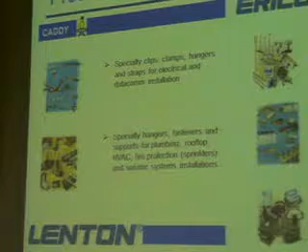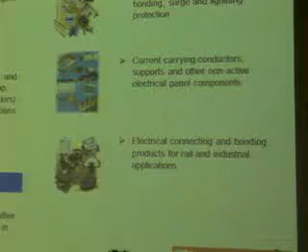The Caddy business is divided again into a very focused business. We have divided it into 4 or 5 groups of focused business, but generally if you break it up, it's split between electrical and mechanical. For the mechanical side, we have specialty hangers and fasteners to support plumbing, rooftop, HVAC, fire protection, and seismic. From the electrical side, we have products to supply anything from electrical installation right through to the data center, right through to the telecommunication tower. So it's a very focused business.

But today we're just going to cover the fire protection side, because that's what Saberindo's business is into - fire protection.

We have a global presence. We actually have an office in Jakarta, at the Sapona Tower. I used to go to that office a lot. For the lightning protection, the Erico side, we have one engineer based in Jakarta to support the distributor. So my goal for Caddy is to develop the business so that I can hire a local engineer to be supporting you all on a daily basis.

To work out, to help you all talk with consultants, support you technically. So my target really is that by 2017, I should have a sales engineer to be based in Jakarta, to support the distributor for just the Caddy.

This fire and seismic team is a global team that we formed in 2011. I am a bit unusual for the Caddy business, in that if a salesperson is doing fire and seismic, they only handle fire and seismic. But because of my experience, I handle the 4 product groups.

I oversee fire and seismic. I also help in the HVAC business. I also help in the electrical side. So it's a very focused team. We serve a very niche market. And one of our strategies is we come up with very innovative product development, which I'll talk about when we go into the product.

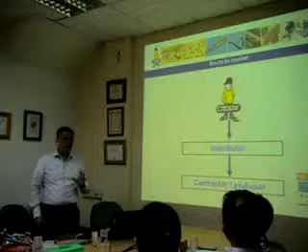So how do we enter the market? Our route to the market is very simple. This is me representing Caddy, and Saberindo will be the distributor. Saberindo will go talk to the contractors, end users, consultants, and all that. So we do not enter the market directly. In every country that we operate in, we do not enter the market directly.

Also, the other difference is we do not believe in having too many distributors. We're not like Tyco, we're not like Viking, where they have multiple distributors, and sometimes the distributors fight among themselves doing the project. So we tend to deal, for example, with this fire products, we only deal with Saberindo.

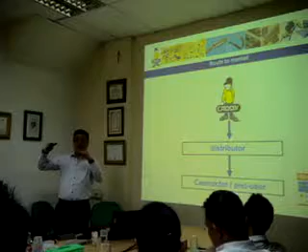Any inquiries that come, let's say a contractor, after you go and do your spec work, contractors always like to try to contact Caddy to see whether they'll go direct. Often, the way we see the risk, we say please contact PT Saberindo. And most of the time, as we move on in this relationship, I will get a project update from either boss himself or one of you saying, sir, these are the projects we're working on. So any time we receive an inquiry, we know what projects we're talking about, and we would not let the contractor or another so-called agent come and control the market.

It's important, I stress this a lot because I've seen some of the big brands, when they don't manage this well, they don't care whether, ultimately, they know the brand will be used, but whether they buy from distributor A or distributor B, they don't care. But in Erico, we don't want to operate like this, because it becomes very confusing in the market, and more often than not, the price will have a problem.

Because if Samuel is competing with you on the same product, you cannot offer any difference. The only difference you offer is either delivery or price. Because of that, she's also trying to compete with both of you, so it becomes 5% less, 5% less, then they come back to me, Spencer, this project, we need more discount. And then we give the discount. At the end of it, the price just keeps going down.

So for 112 years of Erico's operation, we do not believe in that route. Big brands like maybe these guys, they can, because they are big. We are not. Our turnover is 580 million, but we are a privately owned company, so we are not being pressured by shareholders or investors to change the model. So our model has been kept that way, and we will continue with this model as we move on.

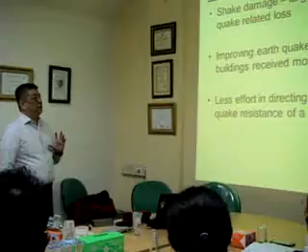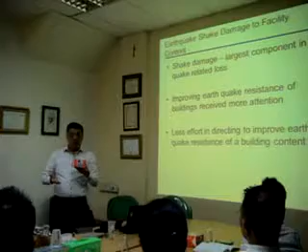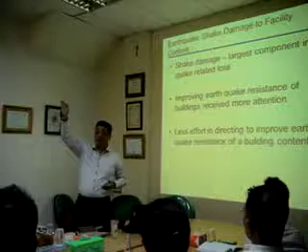I think some of you have heard this yesterday, right? Now, when an earthquake happens, the biggest damage that's caused is usually the shaking. If I use this box example, this is a building. When an earthquake comes, the shock wave comes and basically causes the building to move. And when the building shakes, you have electrical services on top, HVAC, plumbing, gas, every service. So the services are knocking each other, and because they knock each other, it creates damage.

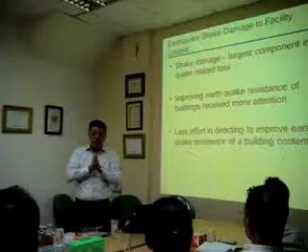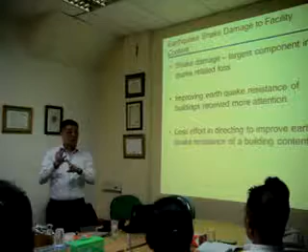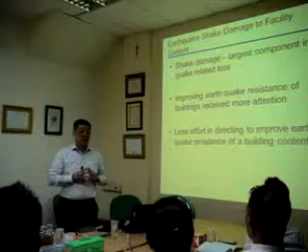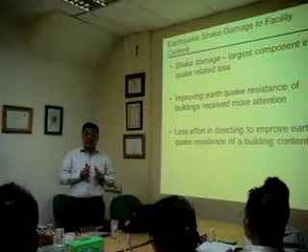What a lot of consultants or owners don't understand is, if you look at a project's total cost, 20% to 30% of the cost is only on the structure. 70 to 80% is on the MEP services - that means mechanical, electrical, and plumbing. Fire protection, I estimate, takes about close to 20% of that 70%. Electrical is probably another big one, and the other big one is actually the plumbing side, depending on what sort of project. But if you look at an industrial project, fire protection takes up quite a big piece of the total MEP cost.

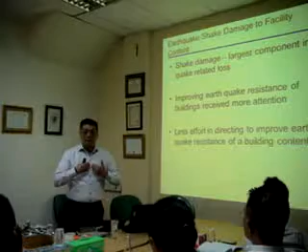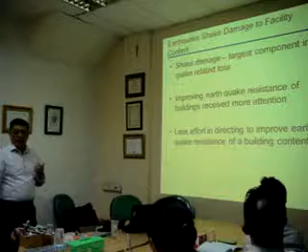But what has happened is that a lot of owners do not understand - they keep thinking about protecting the building, they don't think about protecting the mechanical and electrical services. So this is where we come in, to go back and tell the consultants and the owners: no, you must look at protecting your mechanical and electrical services. Really, if you look at it, the largest component in earthquake loss is really the shaking, that's causing that.

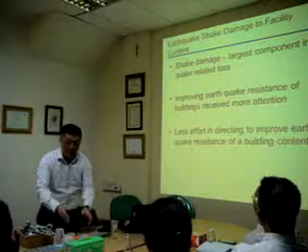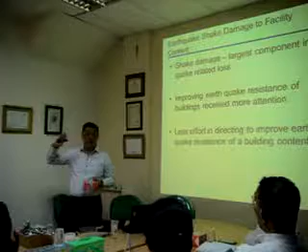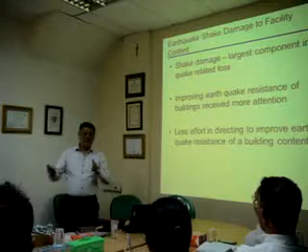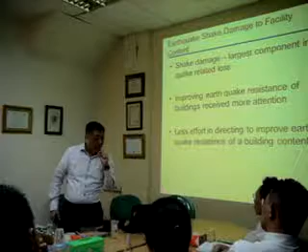Next, a lot of attention has now been focused on how we can make buildings more earthquake resistant. Just like in Indonesia, all your buildings at Jalan Jenderal Sudirman are being designed for earthquakes, meaning they can withstand an earthquake. But when an earthquake comes, the building will still shake. When the building shakes, services that are not protected will engage each other and cause damage, as I mentioned. So what we're seeing is that in developed countries, they have now made buildings more earthquake resistant, but they are paying more attention to MEP bracing, to prevent this from moving and getting damaged.

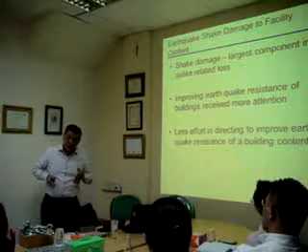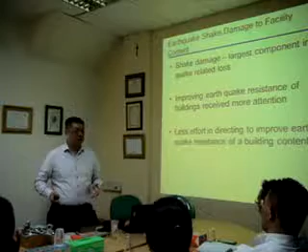So you'll find that in Indonesia it's the same track - the structural engineer will start to look at building the building to be more earthquake resistant. So now it's our job to go to the MEP consultants, or ME consultants, and say, listen, you must look at the seismic restraint for the MEP services. I'll talk about why we only talk about fire protection later.

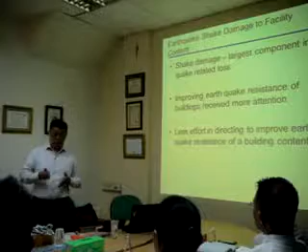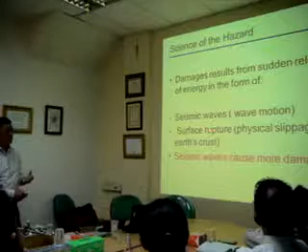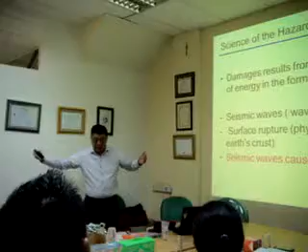So the damage that results is really the sudden release of energy from the earthquake - it could be a seismic wave, a wave motion, or it could be surface rupture. As we know, there are a few fault lines in the world, so basically what happens is that the surface will just rupture to cause it. The other one is the earthquake wave motion that comes underneath the building. But really, the biggest cause, as I said, is this wave motion, not so much the rupture.

If you look at Nepal recently, the damage is more caused by buildings collapsing, not so much the slippage of the physical earth. The earth didn't move so much; it's that the seismic wave causes the building to collapse.

Now there are some science of the hazard, different for FM Global for example. Let me take one step back. I think I asked this before, but for those I didn't ask, I'll ask today - do you all know what Factory Mutual is? FM Global, do you know?

It's actually an insurance company, the world's oldest insurance company, established in the 1800s. If I remember, it's 1863 or 1873.

How the company started in this insurance business is, the previous owner realized we need to protect ourselves against risk. Insurance is all about risk management. So for example, if you buy life insurance, what are you protecting? In case something happens, there's some form of compensation given to you. So what does insurance do? It hedges the risk.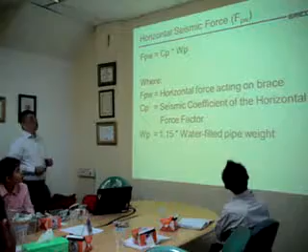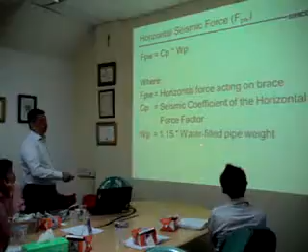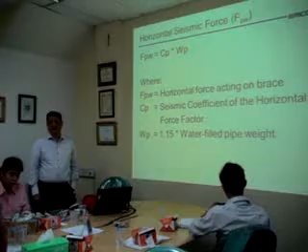So how do you do this calculation? Actually it's very simple. FPW, the horizontal force, is determined by the seismic coefficient of horizontal force CP, times the water-filled pipe weight, times 1.15. That is the calculation. Our software automatically calculates that for you.

I'll talk about WP first, it's easy - water-filled pipe weight, you can get it from any source, our software also has that. There is a standard weight for what a Schedule 40 pipe for 1 inch will weigh with the water. The plus 1.15 is for the fittings weight - it could be the coupling, it could be the valve.

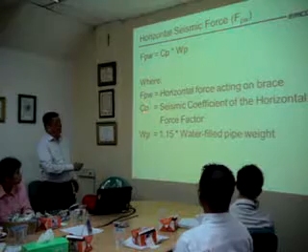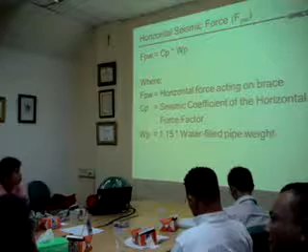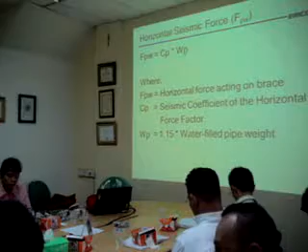Now, the understanding is understanding this CP. There are two standards that govern the seismic bracing. For FM it's 2-8. For NFPA it's 13, Chapter 9.

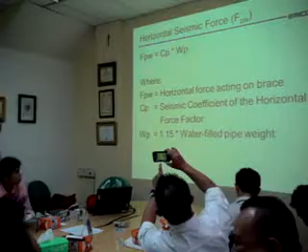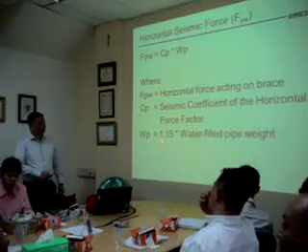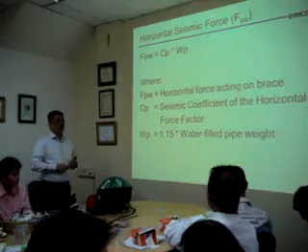Don't worry, I will make a copy of this presentation for you, it's only for you to write. Now this is important, you've got to listen to this. If it's an FM job, the way to determine this CP is different compared to an NFPA job. I will share you the difference now.

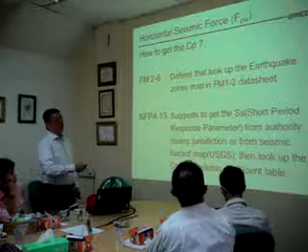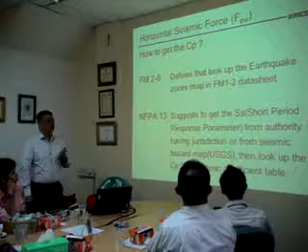For FM 2-8, you need to go to the FM 1-2 data sheet, which is a worldwide map for FM on the seismic zone. For NFPA 13, you have to go to a website, the US Geological Survey, to look up the short period response parameter and then look up the coefficient table in the NFPA. So it's a bit more work.

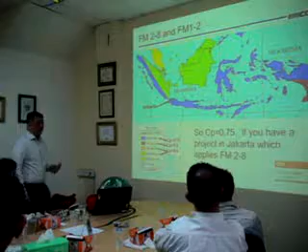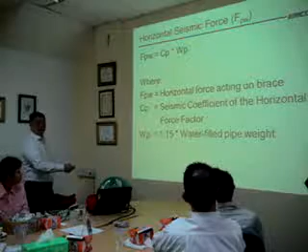Let's talk about FM first. FM is very simple - they have this map of the world, and in this case I just extracted Indonesia. What they've done is zone it according to the probability of a big earthquake happening in 50, 100, 250, and 500 years. In this case, they've determined that the CP here, the highest, is 0.75. So it's 0.75 times 1.15 times 1 times the water-filled pipe weight. So you determine this FPW.

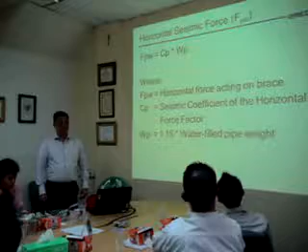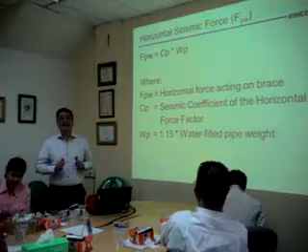Got it so far? Don't worry, the software calculates everything. I need you all to understand this, because your consultants will ask you how you calculate this. The software will calculate it, but you will be able to explain how it's calculated.

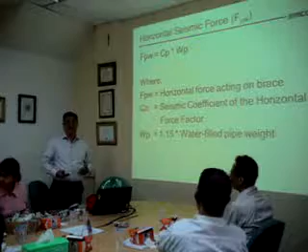What do you think will be the impact of the difference on the CP value? The impact will be the spacing on the brace. The higher the value means your spacing is smaller, shorter. That's all it is.

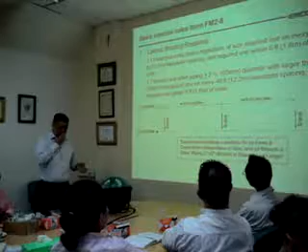So for lateral brace, what are the 2 groups required? Group 1, whether it's a feed or cross main, regardless of size, you will need a brace at a maximum given spacing of 12.2 meters, and at the end of the pipe, you require 1.8 meter maximum spacing where you need to put a brace.

So if I take this as the pipe, and this is flowing this way, at the end of the pipe, maximum spacing is 1.8, then you need to put a brace. Then the distance allowed is 12.2 meters for a lateral brace.

So if I use this example, this pipe is ending this way. Here is one brace. Maximum spacing is 12.2 meters, the maximum spacing. It doesn't mean it always happens at 12.2. Because if I'm using a 0.75 factor, the spacing could be smaller than 12.2. It could be 9, it could be 10. The standard is calling for the maximum spacing at 12.2.

Because I have been questioned by some consultants or contractors, if it's maximum, why don't you just put it at 12.2 in every project? Then why do you need to calculate the horizontal force? The horizontal force determines the spacing, remember, and the number of braces. So if it's always 12.2, why do we need calculation? We just put one every 12.2 meters. So it's not as what people think it is. 12.2 is the maximum spacing.